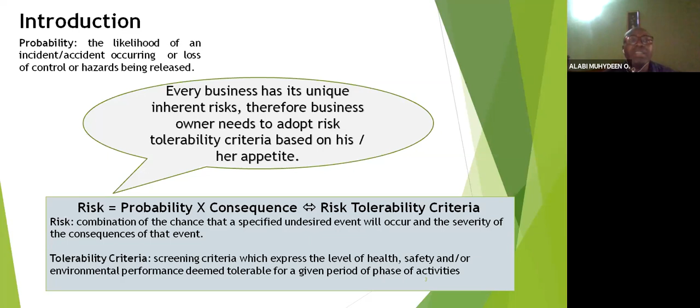And tolerability criteria is just a screening criteria which expresses the level of health, safety, and environment, as well as assets, which has to do with loss of facility or loss of production, deemed tolerable for a given period or phase of activities. Probability is just the likelihood of an incident or accident occurring, or loss of control or hazard being released. While consequence is talking about the impact that release of energy or hazard can cause and how bad it can be.

That is why one of the key characteristics of a good safety company is you maintain a sense of vulnerability. What that does for you is it helps you to look at your risk and say, okay, what can go wrong? Now, if you are able to identify what can go wrong, you will ask yourself, who can be harmed? If you identify that, then how bad can it be? That's evaluation. Then that will help you to say, okay, what are the preventive measures and safeguards I have in place?

If you go after that, you look at mitigative measures. If you're able to answer all this, then you determine that, oh, my risk is this. Then you compare your risk with risk tolerability criteria. If it is lower than risk tolerability criteria, you can say your risk is as low as reasonably practicable. But if it is above, you are required to do more by providing more mitigative measures so that you can bring the risk to low.

Now, I would like to also look at qualitative and quantitative. There is a link between them, and there is also some similarity. Both are risk assessment tools used to identify and analyze risk. As we all are aware, the last session we had with engineer Adetono, we talked about HAZOP. HAZOP is a typical qualitative risk assessment whereby you gather a multidisciplinary team, and the result of that HAZOP is dependent on the experience, exposure, and understanding of the process of the team. Based on that, it's very, very subjective.

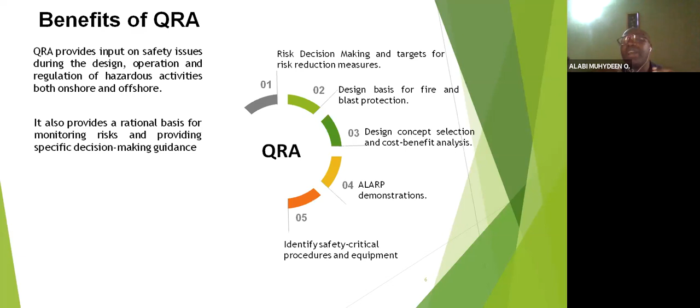Now, you can also use QRA to demonstrate ALARP in case you have a situation where you need to demonstrate to the regulator that this situation has been brought to a safe level. Then it also helps you to identify safety critical procedures and equipment, because all those safeguards you put in your QRA that brought the risk to ALARP, you are going to identify them as safety critical equipment or procedures, whereby we are going to program them into a computerized maintenance management system for thorough tracking of their preventive maintenance, so that at every point in time you call them, they will be able to act as intended.

Then it also helps you to determine a safe distance or buffer zone between two facilities to prevent domino effect, and also between a residential and industrial area. For instance, what happened in Abule Ado in Festac is a typical QRA failure, because an LPG plant is at 100 bar and there's no blast wall, there's no safe distance. Now, assuming that they are unable to provide a safe distance around there, they should be able to build a blast wall tall enough to withstand that explosion pressure, to the point that you can see the kind of property damage we have in that area.

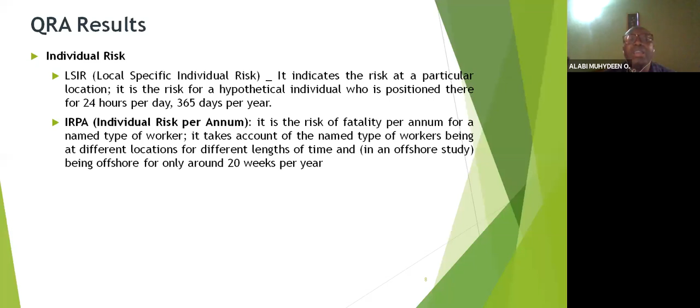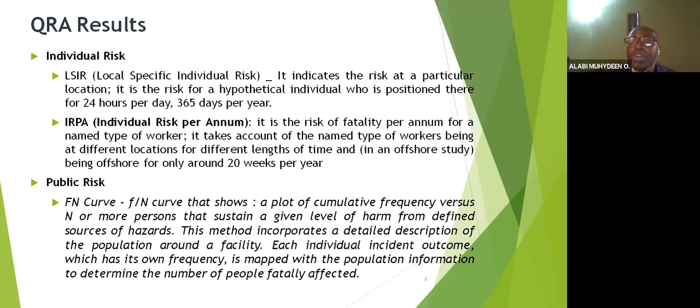Now, the one that has to do with the public is usually in the form of a fatality versus number of population curve, the FN plot of cumulative frequency versus population N that sustain a given level of harm from a defined source of hazard. This method incorporates a detailed description of the population around the facility and each individual incident outcome, which has its own frequency, mapped with the population information to determine the number of people fatally affected. It's a form of XY graph, which can be used to estimate at any point in time the number of people that can be injured, if the population has reduced or has increased. Now, the next is application of QRA.

A case study will be discussed, and this is one I personally performed. Now, we tried to expand our facility in Ghana. The facility actually has 140 million standard cubic feet capacity. Then we planned to expand it to 345 million standard cubic feet.

Now, from process simulation, we identified two extreme scenarios: low pressure, high flow, then high pressure, low flow. Then we looked at a hypothetical case, which is 60 bar in between. Now, the input data to QRA is atmospheric condition. We need to know how stable the wind is and the wind direction, then the relative humidity of the area, wind stability, and solar radiation.

Then you also need to identify, from your process flow diagram and piping and instrumentation diagram, your isolatable sections. This is a section determined based on your PSV, BDV, and SDV, to determine the inventory you can have in that area and your release rate. These are the ones we considered for that project: incoming pipeline, HP process gas, LP process gas, fuel gas section, vent system, diesel generator system, gas generator system, and export line.

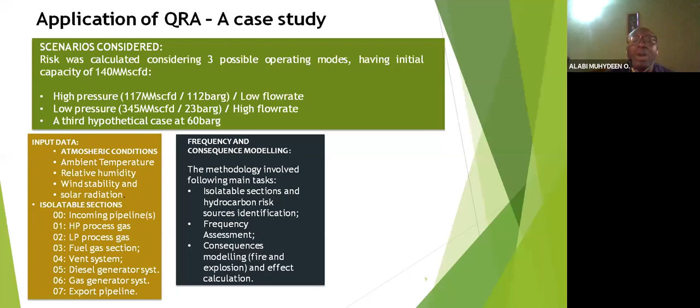Now, from your isolatable section and hydrocarbon release identification, you are going to carry out your frequency assessment, then consequence model, where you take cognizance of fire and explosion, and you calculate their effect in terms of value. Now, the result is going to come out as a risk screening.

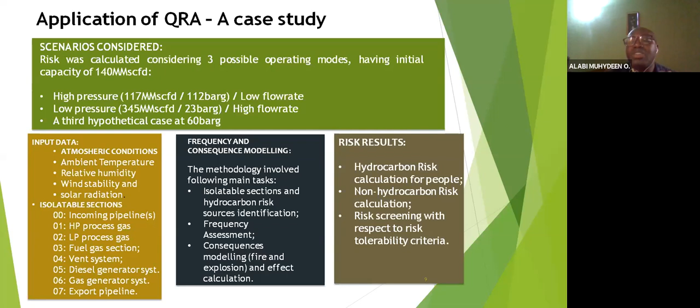For instance, local specific individual risk is usually mapped around the area as a risk contour isopleth. If you get your value for individual risk per annum, it's going to be a number you can compare with the risk tolerability criteria in ISO 17776, which is usually employed for this study.

Now, this is a typical isolatable PFD that we used for this project. Like I said earlier, isolatable inventory is the fluid quantity contained in an isolatable section, and an isolatable section is a process or utility plant section containing both piping and equipment defined by the following boundaries: SDV, BDV, and PSV.

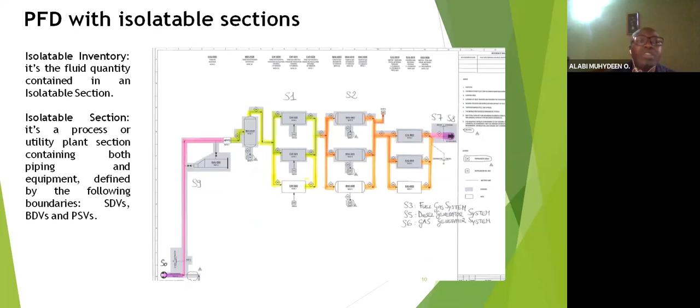Basically, the failure data for each of those pipings, valves, and equipment is usually available in the Yellow Book or OGP failure or leak frequency data. Those are the data you are going to use as a basis, as input to this study. Like I said, that's our case study.

If you look at this page of my presentation, the first risk zone is for workers within the facility, which looks at low risk area, medium risk area, and the other side to my right here is for the public. Now, if you look at case number one that I talked about, 345 at 23 bar, we got individual risk per annum of 6.8 times 10 raised to the power minus 5.

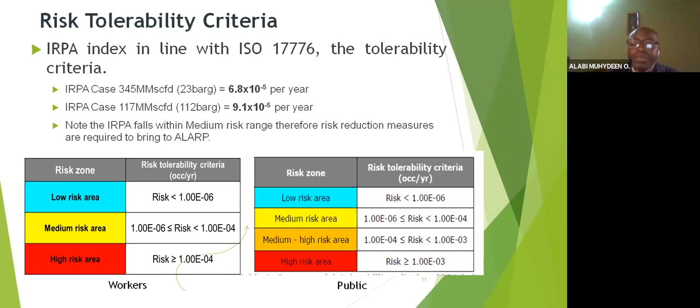And for the other case, which is low flow high pressure, we got 9.1 times 10 raised to the power minus 5. If you compare this with the risk tolerability criteria I put down there, you see that they fall within the medium risk, which is not acceptable. Now, this is a typical presentation of location specific individual risk.

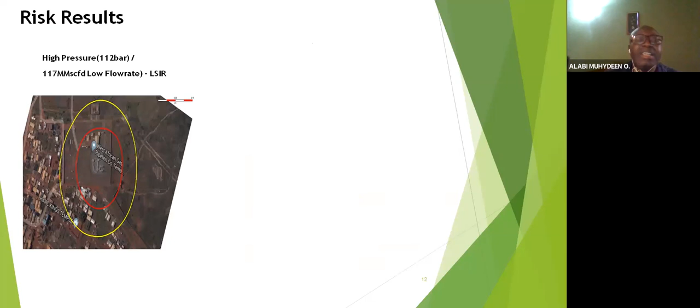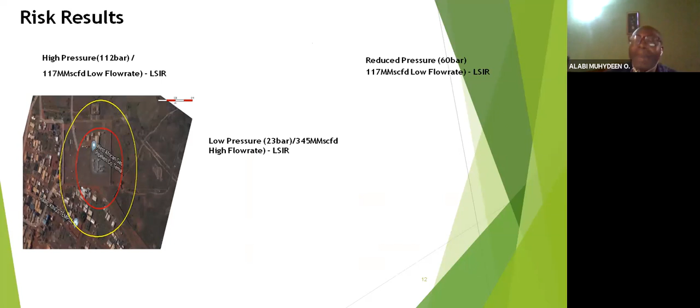This is how it's going to be presented to you. Now, the red isopleth, which is the risk contour, is the high risk area. All the buildings around that area will be impacted if there is a jet fire and explosion. Then the same thing for the second case, which is 23 bar. You can see that the high risk area is within the WAPCo facility. It does not go outside the facility. It's just the medium risk area that is outside the facility.

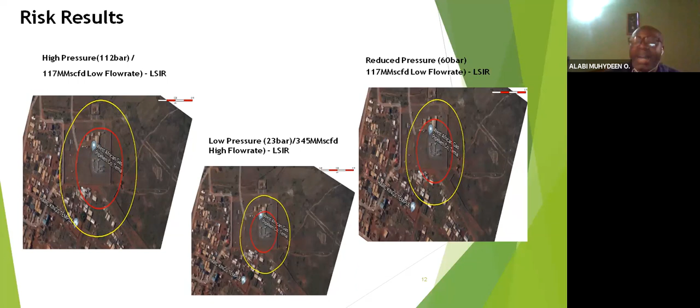And for the hypothetical case, you can see some of the high risk area is outside the facility, which means it presents a risk to the people living around that facility. Now, what is the next line of action? The conclusion is that the inadequate safety gap between the newly upgraded plant and the houses near the east fence is generally intolerable. There's no adequate safeguard. And because of this, there are mitigations we put in place.

We have 3 mitigations in terms of recommendations from the study. The first mitigation is for us to relocate, to remodel the facility so that the high pressure side can move away from the east fence where the public is. But that will be difficult because this is a brownfield facility. We have an existing facility already; we just want to expand it. You can only do that if it is a greenfield facility where you can review the layout.

Now, the next recommendation is to look at relocation of the houses around that yellow and red area. But the government has no political will to do that. A team was constituted, headed by a Deputy Minister, but unfortunately they could not do much because they feel that the opposition will use that against them in the forthcoming election.

Now, what we are left with as an option is reduction in potential leak points and operating pressure. Hence, the capacity of the plant was reduced to 235 and an inlet pressure of 55 is being proposed. Then we install HIPPS to maintain that 55. Anytime the pressure to the facility is above 55, the HIPPS, that's high integrity pressure protection system, will activate and shut down the facility to minimize the impact. And also reducing the capacity.

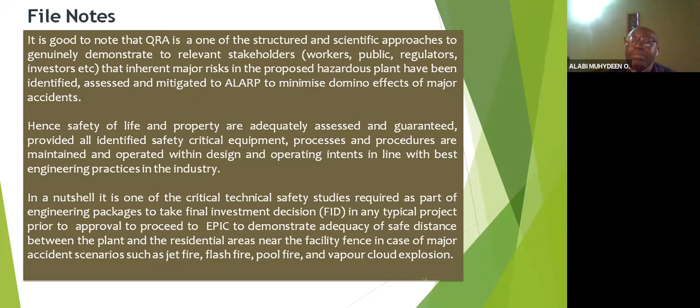In a nutshell, QRA is one of the critical technical safety studies required as part of the engineering package to take final investment decision in any typical project prior to approval to proceed to EPIC, to demonstrate adequacy of safe distance between the plant and the residential areas near the facility fence in case there is a major accident scenario, such as jet fire, flash fire, pool fire, and vapor cloud explosion. And basically, this is what QRA is all about.

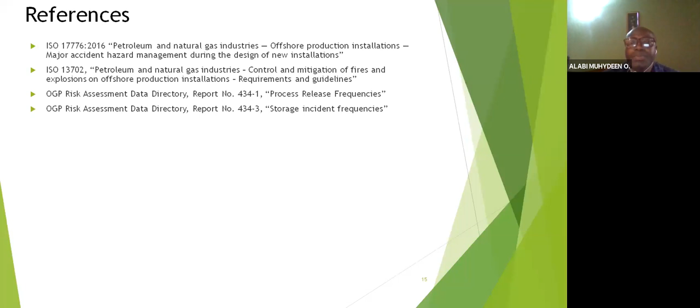Okay, thank you, Engineer Muhydeen Alabi, for this enriching presentation. In fact, our knowledge of quantitative risk assessment as a process safety engineering tool has been heightened by this presentation.